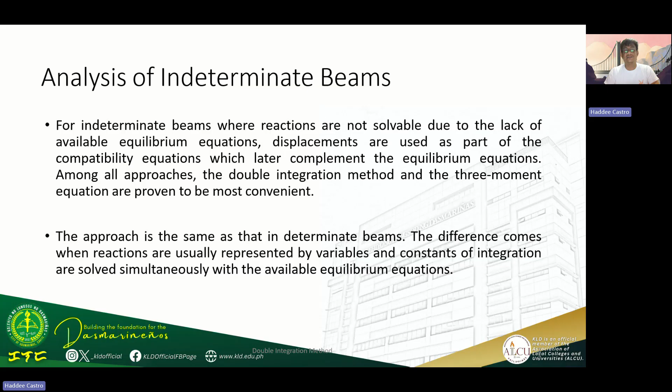Among all approaches, the double integration method and the three-moment equation are proven to be most convenient. The approach is the same as that of determinate beams. The difference lang, reactions are usually represented by variables and constants of integration are solved simultaneously with the available equilibrium equation. Okay? Let us try to analyze this indeterminate beam.

Determine the reactions at the support of the beam shown. Given yung load, meron tayong 20 kilonewton, which is 1 meter from A, and then a uniformly distributed load of 10 kilonewton per meter from C to D, which is 2 meters. There is a roller support at A, at the midspan of the beam an internal roller C, and a pin support at D. The length of the beam is 4 meters.

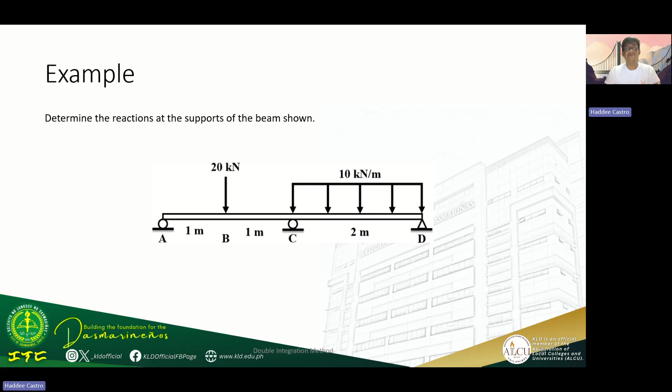First, we assume the reactions to be upward: RA, RC, and RD. Then solve for the reactions using equilibrium equations. For summation of vertical forces, we get RA plus RC plus RD equals 40. That will serve as equation 1, kasi hindi pa natin masasolve yan. Then summation of moments at C will give us RA minus RD equals 0, and that will be equation 2.

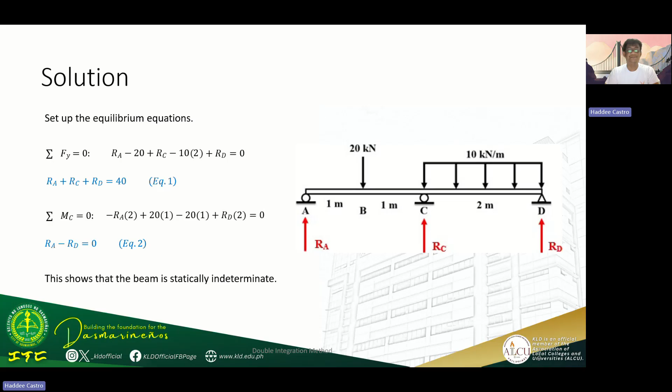As you can see, 3 unknowns, dalawa equation lang. That shows that the beam is statically indeterminate, so we need an additional equation to solve the reactions. Dito na papasok ngayon si double integration method. Set up the loading function and derive the slope and deflection function.

For the load: RA⟨x − 0⟩^-1 − 20⟨x − 1⟩^-1 + RC⟨x − 2⟩^-1 − 10⟨x − 2⟩^0. RD hindi nakasali kasi nasa far end na siya. Integrate and we get the shear function: RA⟨x − 0⟩^0 − 20⟨x − 1⟩^0 + RC⟨x − 2⟩^0 − 10⟨x − 2⟩^1.

Then M, the moment function: RA⟨x − 0⟩^1 − 20⟨x − 1⟩^1 + RC⟨x − 2⟩^1 − 5⟨x − 2⟩^2. Naging 5 na lang siya kasi raised to 2, magiging over 2 siya; 10 over 2 is 5. That will become EI times the second derivative of y with respect to x.

Integrate and we get EIθ = 1/2 RA⟨x − 0⟩^2 − 10⟨x − 1⟩^2 + 1/2 RC⟨x − 2⟩^2 − 5/3⟨x − 2⟩^3 + C1. Okay? Then integrate again to get the deflection equation. Ito yung slope, ito deflection.

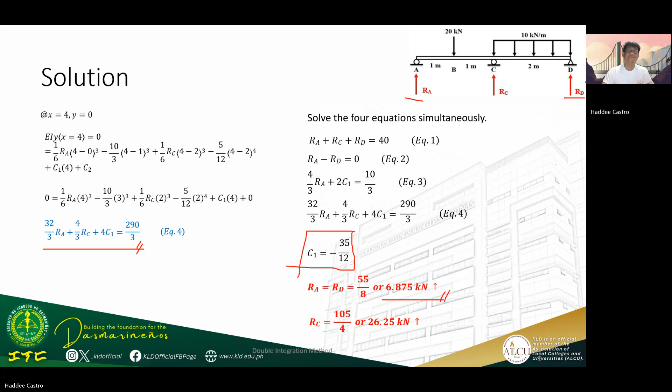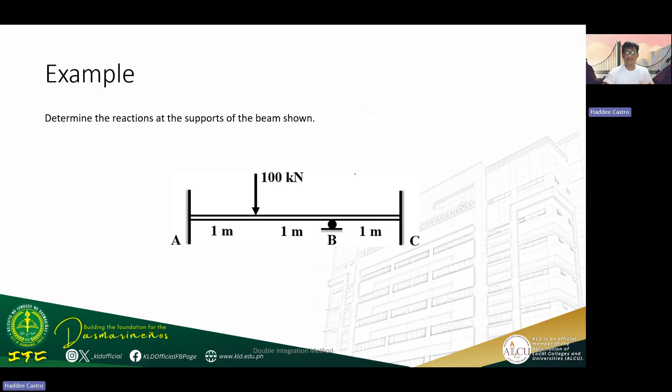So, let's try another example. Determine the reactions at the support of the beam shown. So, ganun ulit. Assume muna mga directions ng unknown reaction. So, as you can see, di ko na nilagay yung horizontal kasi same lang naman siya doon sa RC. Wala namang horizontal load. So, no need na. So, therefore, MA is counterclockwise, MC is clockwise, RA, RB, RC is upward.

Okay? So, using equilibrium equations, we can get two equations. So, that will be RA plus RB plus RC equals 100. That will be equation 1. And summation of moment at C, so sa dulo, will give us 3RA plus RB minus MA plus MC equals 200. That will be equation 2.

So, this shows that the beam is statically indeterminate to the 3rd degree. Kasi, kulang pa tayo ng 3. Diba? So, 5 unknowns minus 2 available equilibrium equations. So, 3rd degree. So, we need an additional 3 compatibility equations to be able to solve the reactions.

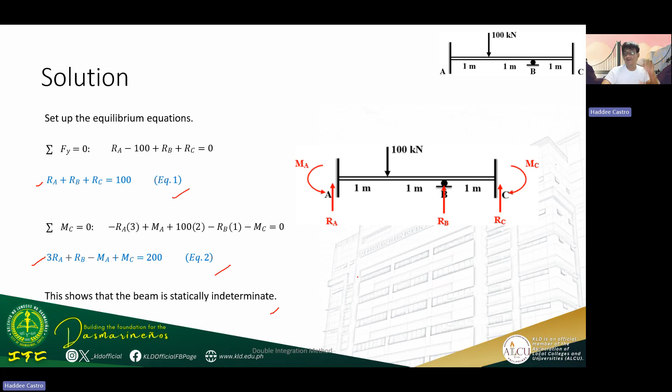So, set up na natin yung loading function. So, eto. So, integrate. Alam niyo na yan. And then, integrate again to get the moment function. So, dito ka na magsisimula, pag-integrate mo ulit, magkakaroon ng constant. So this is your moment function, which is negative MA, x minus 0 raised to 0, plus RA, x minus 0 raised to 1, minus 100, x minus 1 raised to 1, plus RB, x minus 2 raised to 1.

So therefore, integrating will give us negative MA, x minus 0 raised to 1, plus 1/2 RA, x minus 0 raised to 2, minus 50, x minus 1 raised to 2, plus 1/2 RB, x minus 2 raised to 2, plus C1. And then integrate ulit, magiging EIy na. So this is now your deflection equation. So, nagkaroon na siya ng C1 tsaka C2.

Okay? So, utilize na natin yung mga boundary conditions. So, napaswerte ka lang kasi yung fixed end, di ba sinabi ko na sa inyo before, for a fixed end, theta there is also 0. No deflection and no slope. So, boundary condition natin, x equals 0, theta is 0, and deflection is 0. So substituting x equals 0 into the slope and deflection equations, we get C1 equals 0 and C2 equals 0. Diba? So pwede na natin tanggalin itong dalawa.

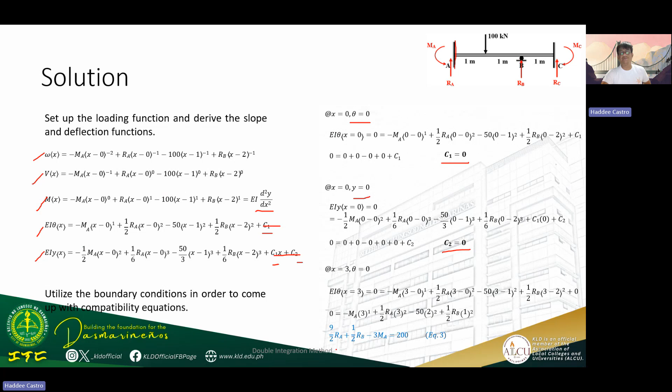And then another boundary condition, x equals 3, theta is 0 also. Diba? So 3 na yung x. Substitute natin sa slope equation. So that will be 9/2 RA plus 1/2 RB minus 3 MA. And that will serve as your equation 3. And then substitute ulit ang x equals 3 sa deflection equation kasi 0 rin naman yung deflection dyan. So that will give us 9/2 RA plus 1/6 RB minus 9/2 MA equals 400/3. And that will be your equation 4.

And then another boundary condition at B, where there's an internal roller. As you can see, it will also not deflect there, diba? 0 ang deflection dyan kasi may support. So therefore, x equals 2 naman yung boundary condition. Deflection is 0. Equating the deflection equation to 0 will give us another equation, which is 4/3 RA minus 2 MA equals 50/3. That will be equation 5. And then solve the 5 equations simultaneously. Ito na yung equations natin. So this is now the final answer.

So kapag positive, tama yung directions. Kapag nag-negative, ibig sabihin lang nun, i-reverse mo lang yung direction. Tulad ng RC, nag-negative siya. So therefore, hindi pala siya pataas, pababa pala siya. Okay? And then MC is counterclockwise. So hindi siya clockwise. Alright.

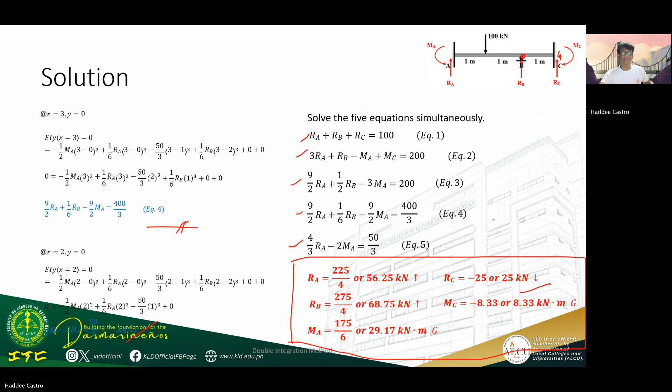So syempre, we can also determine the maximum deflection using the double integration method. The maximum deflection in the beam is significant in structural design as it dictates one of the serviceability requirements in a building. So basically, from the relationship between curvature and moment, a higher bending moment usually leads to a higher curvature. However, factors such as flexural rigidity and beam supports also contribute to the location and value of the maximum deflection. So the maximum deflection is located in any of the following.

So between two supports, within the braced segment where the slope of the tangent line is 0. So pag between supports, hanapin mo lang yung slope ng tangent line na 0. Diba? So parang sa shear and moment, kapag nag-0 yung shear, automatic andun yung maximum moment. Diba? So ganun din siya sa maximum deflection. And then, between a beam support and the free end, for an overhang or cantilever, where the slope of the tangent line is 0.

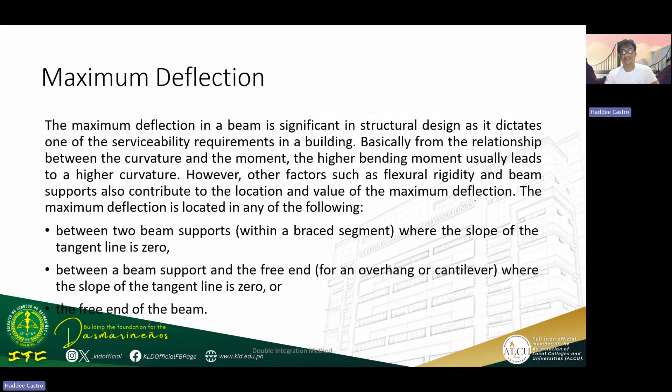Sa fixed end, pwede rin nandoon. Or sa free end ng beam. Okay? So lahat yun sa cantilever na doon, so may free end lahat. Pero kailangan mong i-analyze parehas, para malaman mo kung nasaan talaga yung maximum deflection. Okay? So let's try this one.

So this is an overhang beam. May pin sa A and internal roller at B, which is 2 meters from A. And then may 40 kilonewton downward load at C. So let us determine the maximum deflection in the beam shown. Use EI equals to 100,000 kilonewton meters squared. So hindi natin alam kung paano magde-deflect to, no?

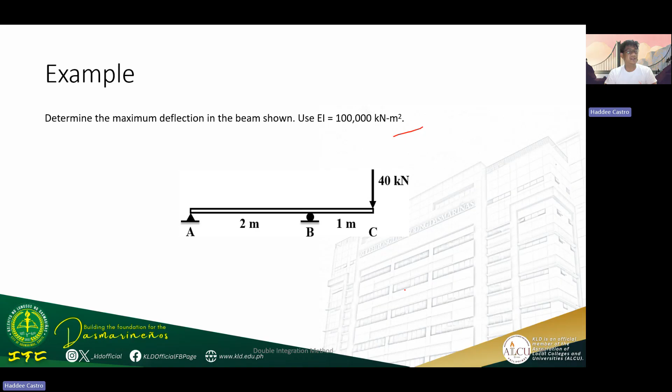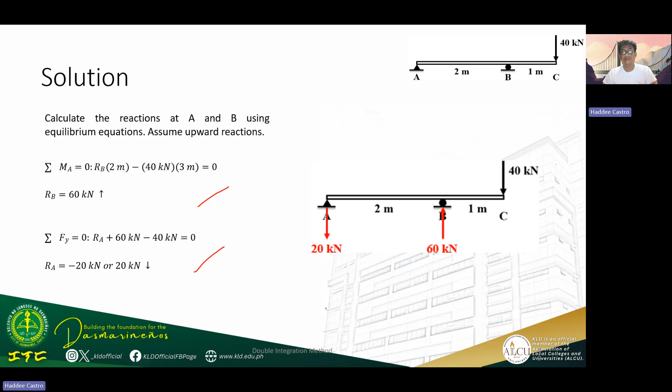So let us solve for the reaction. We can solve the reaction because this is a determinate beam. So solving the reaction will give us downward 20 kilonewton at A and upward at B, 60 kilonewton. Okay? So you know how to solve na ng reaction, so no need to elaborate and explain this one. Using equilibrium equation. And now set up the loading function.

So loading natin, negative 20⟨x − 0⟩^-1 plus 60⟨x − 2⟩^-1. So hindi nakasali yung 40 kasi nasa right end na siya, dulo. Integrate, you will get the shear function, which is negative 20⟨x − 0⟩^0 plus 60⟨x − 2⟩^0. And then integrate ulit to get the moment function: negative 20⟨x − 0⟩^1 plus 60⟨x − 2⟩^1. So that will be equals to EI, second derivative of y with respect to x.

So now, integrate will give us EI theta, slope function na, which is negative 10⟨x − 0⟩^2 plus 30⟨x − 2⟩^2 plus C1. So magkakaroon na ng constant, di ba, pag slope tayo. Then integrate again, give us negative 10/3⟨x − 0⟩^3 plus 10⟨x − 2⟩^3 plus C1x plus C2. And then solve for the constants C1 and C2 using boundary conditions.

So as you can see, at x equals to 0, y is 0. So substituting 0 into the deflection equation will give us C2 equals 0. And then at x equals to 2, also y is 0. Substitute 2 for x and equate the deflection equation to 0: negative 10/3 (2 − 0)^3 plus 10 (2 − 2)^3 plus C1 times 2 plus 0, will give us C1 is 40/3. So this is now your final equation for the elastic curve of this beam.

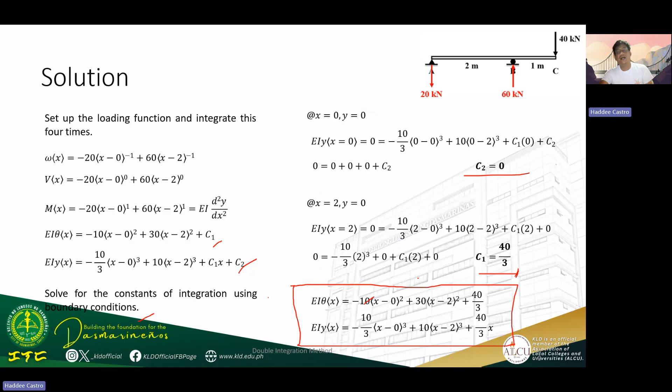So now, let us determine the location of the maximum deflection. Sabi nga, the maximum deflection can be located either at the free end if it exists or between two supported points where the slope of the tangent line is 0. So as you can see dito, dalawa. Between supports, pwede siya, kasi pwede mag-deflect ng ganito. At saka sa free end. So i-analyze natin parehas. Unahin natin yung between supports.

Sabi dyan, at maximum deflection, 0 yung theta. So ang i-equate natin sa 0 is yung slope equation: 0 equals negative 10(xm for segment AB − 0)^2 plus 40/3. Using algebra, will give us xm equals 1.1547 meters. So that is one location. Another location is at x equals to 3. So para malaman natin kung nasaan yung maximum deflection, just substitute it to the deflection equation.

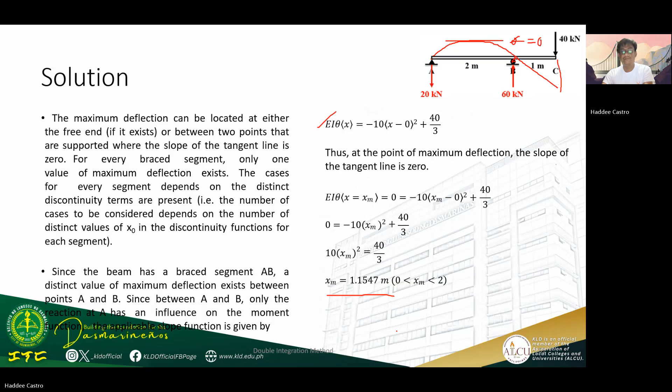Unahin natin si 1.1547. We will get a deflection between those supports of 1.03 times 10 to the negative 4 meters, upward. So tama yung ating drawing ng elastic curve. Substituting 3, which is at the free end, will give us negative 4 times 10 to the negative 4 meters, so downward naman siya. Since the second value has a larger magnitude than the first, the maximum deflection is located at the free end, given by 0.4 millimeter.

So that's how you solve maximum deflection using double integration method and how you solve reactions of indeterminate beam using double integration method.